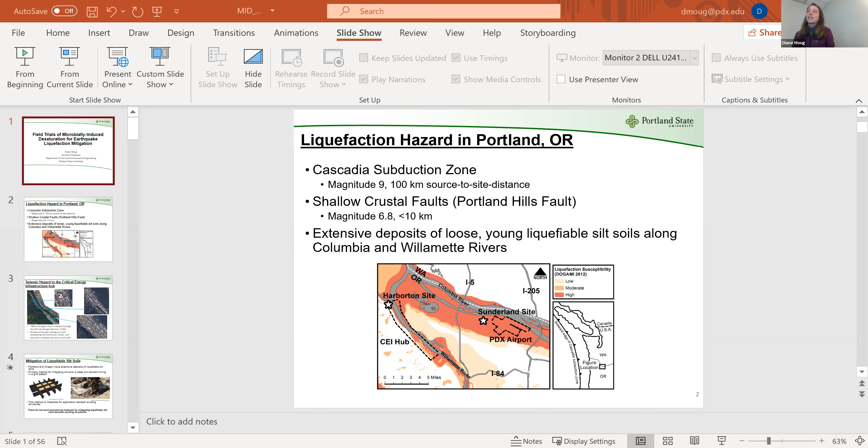There's particular concern about the liquefaction hazard in the Critical Energy Infrastructure Hub, or the CEI Hub. And this is an area along the Willamette River, shown here. There's many fuel storage tanks within the CEI Hub. And the hub itself is where about 90% of Oregon's fuel is handled, including all the fuel for the Portland International Airport. And so there's concern that the strong earthquake shaking can cause liquefaction of these silty soils, that can lead to deformation or settlement of the ground that then will put strains and cause damage to these fuel storage tanks.

And I've clipped some images here of the fuel storage tanks that are located along the Willamette River. So there's concern that this can cause an environmental impact if the fuel spills into the Willamette River and migrates down to the Columbia River. It can cause health impacts if there's hazardous materials that vaporize into the air or potentially burn. And then economic consequences as well, since this is Oregon's fuel supply. And if there isn't access to it following an earthquake, that will really hinder recovery from the earthquake itself.

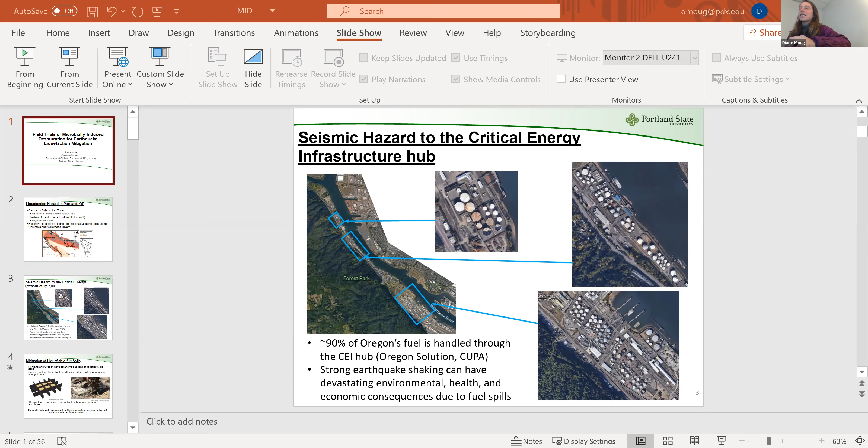So when we think about these silty soils and how we can mitigate the liquefaction hazard, particularly the soils beneath the fuel tanks, the primary method for mitigating these silty soils is deep soil cement mixing. And these are some images that I got from Condon Johnson Associates. So on the left here is a schematic of deep soil cement mixing, where the cement is mixed with the soil in a grid pattern, and that helps to reinforce the strength of the soil as a whole. It acts like rebar does in concrete, as in it provides strength for the whole element.

And then there's a video here again from Condon Johnson showing this deep soil cement mixing occurring from one of their projects. But what you can take away from this is that this is quite an invasive method.

This isn't something that can be reasonably applied beneath an existing structure, such as those fuel storage tanks. And where we are right now in geotechnical engineering practice is that we don't have any economical options for mitigating liquefiable silt soils beneath existing structures.

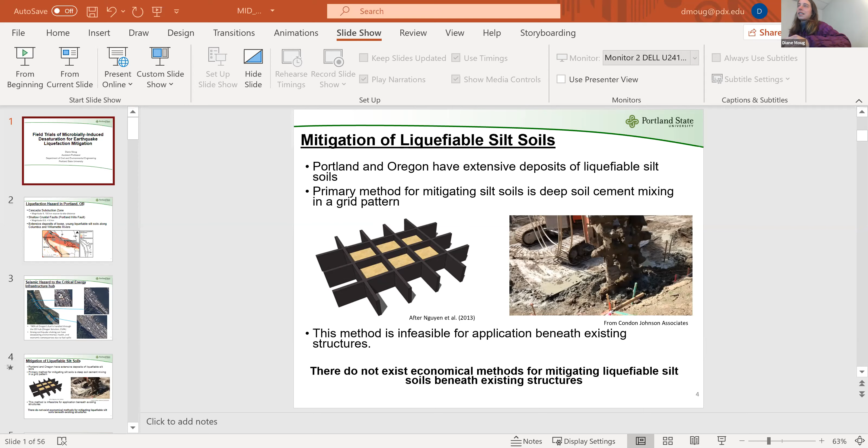So that's sort of where we're starting to look of, okay, what potential solutions are there for mitigating silt soils beneath existing structures, such as those in the CEI hub. And so that's where potentially using desaturation for mitigating liquefaction comes in.

This slide is presenting the results of a study by He et al. in 2013. And what this showed was that a small amount of gas in the soil's pore fluid can mitigate liquefaction by reducing pore water pressure buildup.

So when loose saturated soils are shaken in an earthquake, the soils want to contract or compress, but we have water within that pore space. And so the soils cannot contract, and instead they build up excess pore water pressure and lose their strength. So if we can reduce that buildup of excess pore water pressure, we can mitigate the liquefaction hazard.

So these shake table tests were performed with loose sands in a shear box on a shake table. And then on the left here is showing the results of 3 pore water pressure transducers that were embedded within that shear box, within the saturated soil.

So with this completely saturated soil, showing the results over time, where shaking starts at about 2.5 seconds, and then the water head, or the water pressure that builds up due to that shaking, you can see that there's an increase in excess pore water pressure during shaking, and then that dissipates after shaking stops.

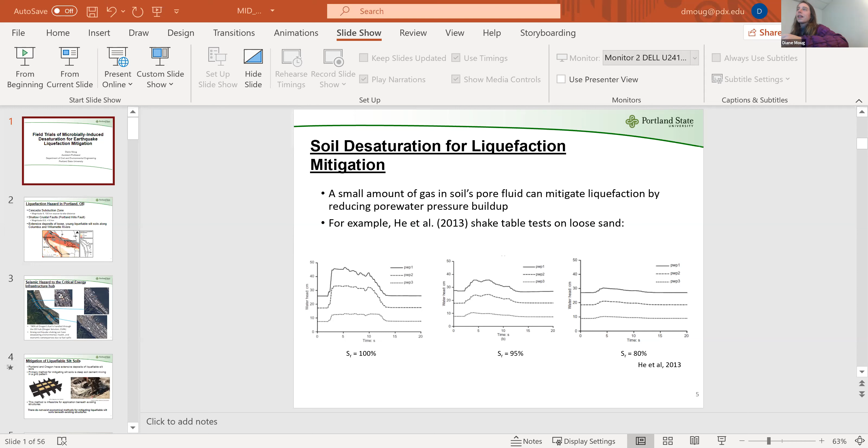In these tests, the saturation was then reduced to 95% saturation, so introducing some air into the soil's pore fluid, and you see that the excess pore water pressure buildup is much less than that fully saturated soil for the time of shaking. And we see an even further reduction when the saturation is reduced to 80%. So introducing some air, or gas, into the pore fluid, reducing saturation of the soil, limits pore water pressure buildup.

There's also results by O'Donnell et al. in 2017, and these looked at liquefaction resistance, or cyclic strength of the soil, as saturation decreases. So this plot shown here was performed with lab testing in a cyclic direct simple shear device. So a small soil element that's subjected to cyclic shearing.

Plotted here is the cyclic shear ratio, or the strength of cyclic loading applied to the soil element, and then the number of cycles that it takes to trigger liquefaction or to fail the soil cyclically in that loading. The dark dashed line on the bottom here is a fully saturated specimen.

And what we see here is that, let's say, for example, at a cyclic shear ratio of 0.3, it takes about 5 cycles to trigger liquefaction. And then at lower cyclic shear ratios, it takes many more cycles to trigger liquefaction.

If the saturation of that soil element is then reduced to 99%, the authors reported a notable gain in cyclic resistance of the soil. So now, for 5 cycles of cyclic loading, that's a cyclic shear ratio of 0.4. And then if the saturation is reduced further to 97%, we see an even further gain in liquefaction resistance.

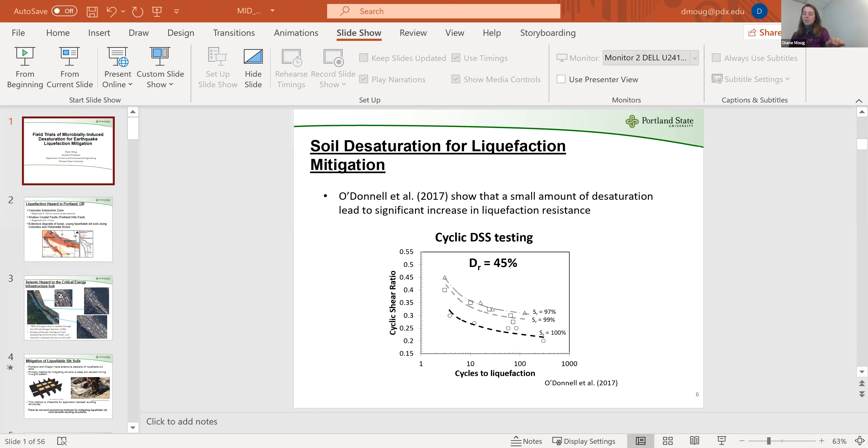And so what we started to think about, or what we used for this project, is a way to induce desaturation in soil using microbes that are native to the soil. And this is microbially induced desaturation, and I'll be referring to it as MID probably throughout the rest of the presentation.

And the idea behind this treatment method is that we can introduce a treatment solution into the subsurface soils that can migrate beneath an existing structure. And this treatment solution will stimulate native bacteria or microbes that are already within the ground to perform a denitrifying reaction. And that denitrifying reaction produces, as some of its products, nitrogen and carbon dioxide gas.

This gas then displaces some of the water in the pore space and desaturates the soil. And this can potentially lead to mitigation of the liquefaction hazard of the soil. This image here is from Sean O'Donnell's work, showing some evidence of microbially induced desaturation. Shown here, this is a sand grain.

These are two sand grains, one here and one here. And the reaction that they were looking at included also precipitation of calcite. And so these crystals here, this mineral, is calcite precipitation from the microbial reaction. But that precipitation developed around a gas bubble between the two sand particles. So this image is showing evidence of microbially induced desaturation, and that evidence comes from having the precipitation of the calcite between the sand particles as well.

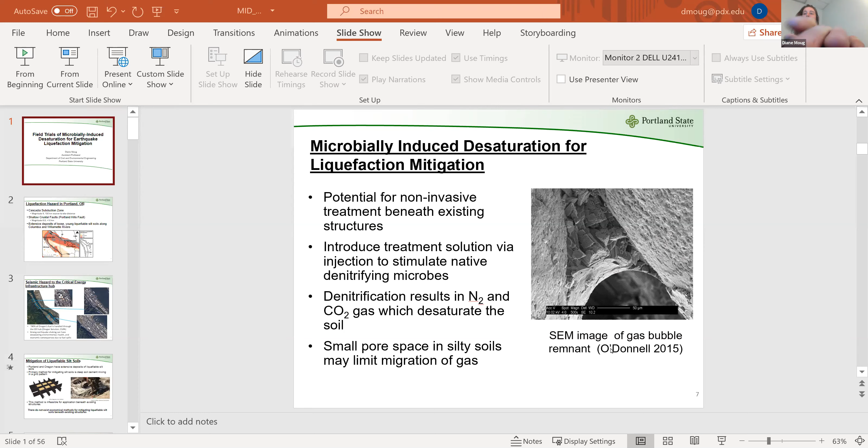Is it not in full screen? I am so sorry, I apologize. It is on my other screen. Let me share this. Okay. How's that? Perfect. Okay, I'm sorry about that, everyone. So you probably weren't even seeing my pointer either. So, okay, this is my pointer now.

So what we're concerned about, or initially concerned about, was gas migrating out of the pore space and then leading to resaturation of the soil. And so one thought was that by applying this treatment method to silty soils, the small pore space in silts compared to sands or coarser grained soils could potentially limit migration of gas out of the soil and lead to longer lasting desaturation.

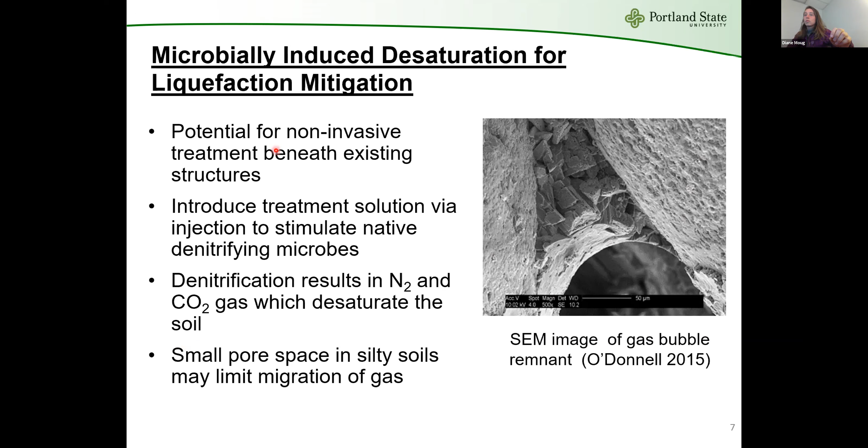So in order to look at MID for liquefaction mitigation, we did 2 field trials of this in Portland in the summer of 2019. And the objectives of doing these field trials were to look at the way that MID performs when it's applied at the field scale, to look at how it performs when it's applied in silty soils, and then to start to examine its effectiveness for liquefaction mitigation. And these 2 field trials were, as far as we know, the first full-scale field trials of MID for liquefaction mitigation in the US.

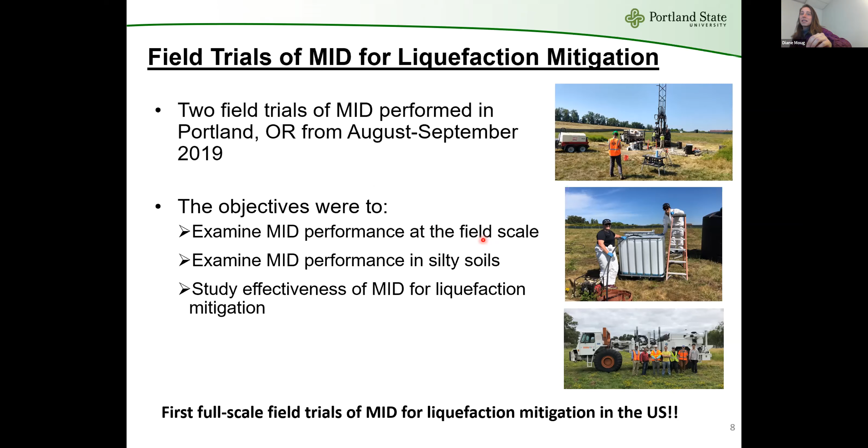So with that motivation of the project behind us, going forward in this presentation, I'll first talk about the subsurface conditions at the 2 field trial sites that we worked at, one called Sunderland and one called Harborton. I'll present the MID treatment solution and its application, and then also discuss some of the monitoring data that we collected and the results from those data. And finally, I'll discuss some of the T-Rex large shaker truck testing that we did at the site to perform in situ cyclic testing, and that was done at the Sunderland site.

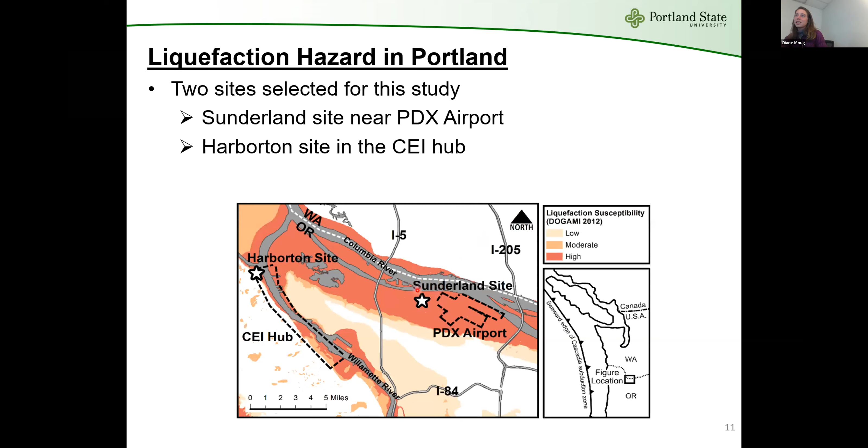The water table at the site was about 1 meter below the ground surface, and we've also seen some seasonal fluctuations in that water table as well. When we performed the trial during the summer, the water table was probably at its lowest extent, or one of the lowest extents. So when we looked at treating the soils at the Sunderland site with MID, we chose an interval to treat the soils from about 1.5 to 6 meters below the ground surface.

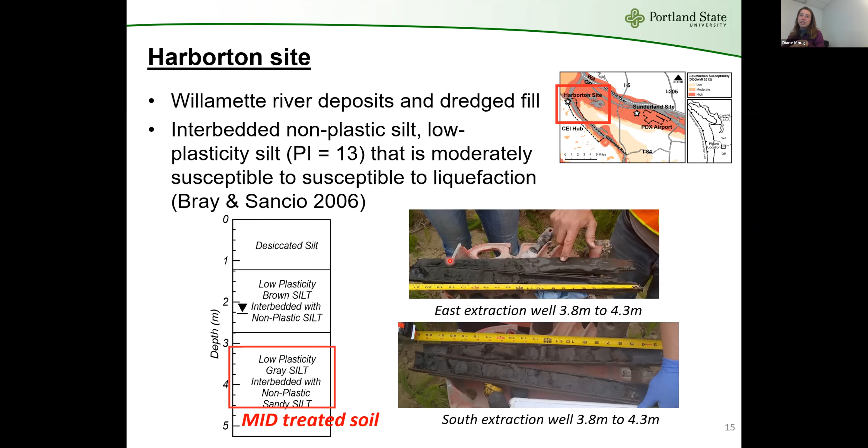So going to the way that the treatment solution was applied at the site and the treatment solution itself. The treatment solution was composed of calcium nitrate and calcium acetate, where these chemicals were placed into these mixing totes, and then water was added to them, and a trash pump was used to circulate them in order to dissolve them into solution.

So the treatment solution reaction, and I'm not going into depth for this here. There's more information on the treatment solution reaction in the Stallings-Young et al. 2020 paper. But I'm just kind of hitting on the main points here. The denitrifying reaction of the microbes is both a catabolic and an anabolic reaction.

With the catabolic reaction, that's where the acetate and the nitrate in solution from the calcium acetate and calcium nitrate react to produce nitrogen gas and bicarbonate, among some other products. That catabolic reaction also generates a little bit of energy, and then that helps to stimulate the anabolic reaction. And it's pretty similar, at least from my understanding of these chemical reactions, but it does produce some biomass as well as nitrogen gas and bicarbonate.

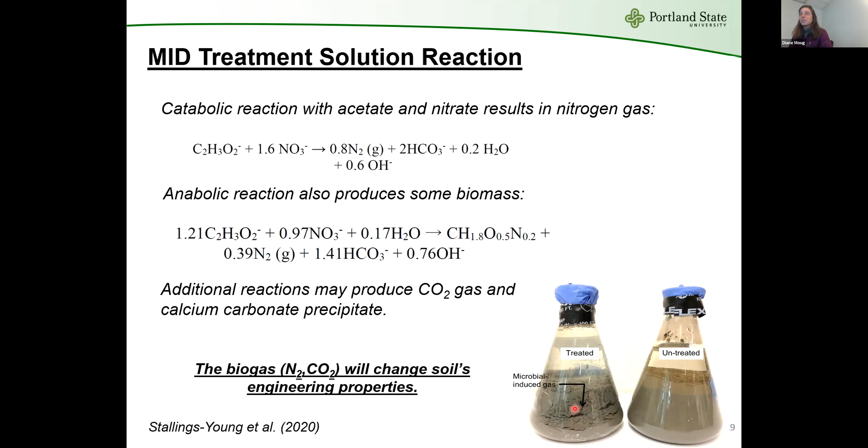So the treatment solution, once it was mixed and then diluted, was fed into the injection well, both through a gravity feed and then also an inline pump that added some extra pressure head in order to overcome both low permeability at the site and also any biomass that may build up within the well screen or the filter pack.

And then we also have a pressure gauge at the top so that we can see what injection pressure we're applying to the treatment solution, and also ease off a little bit if we feel like that injection pressure is getting too high.

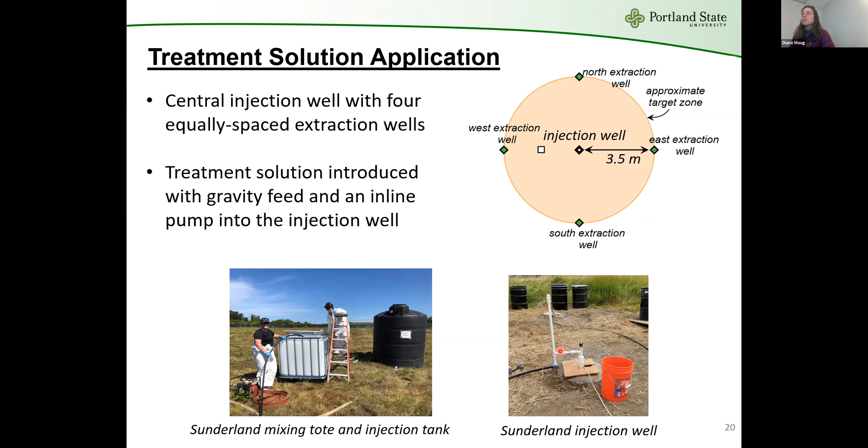The extraction wells had 2 purposes. The first was to give us water from the site, native groundwater, so we could use that for the treatment solution and to mix it. Second was that we were hoping that they could provide some drawdown that would encourage the migration of the treatment solution from the injection well to the extraction well. So we wanted some drawdown, but we didn't want so much drawdown that we were drawing down into our targeted treatment interval and inducing desaturation that way.

So in order to limit the drawdown in the extraction wells, and then also not allow the extraction wells to run dry, we set up a control system that only drew down the water in the extraction wells to a set level. And so these are the submersible pumps that were lowered into the extraction wells. They extracted water that then went into the extraction tank for storage and also for some monitoring.

And then within these submersible pumps, we also included a float switch, so when the water level dropped below a certain depth, the float switch would drop down as well. And it would break the circuit from the battery to the submersible pump. Then the water level, once it was allowed to recover, would bring that float switch back up.

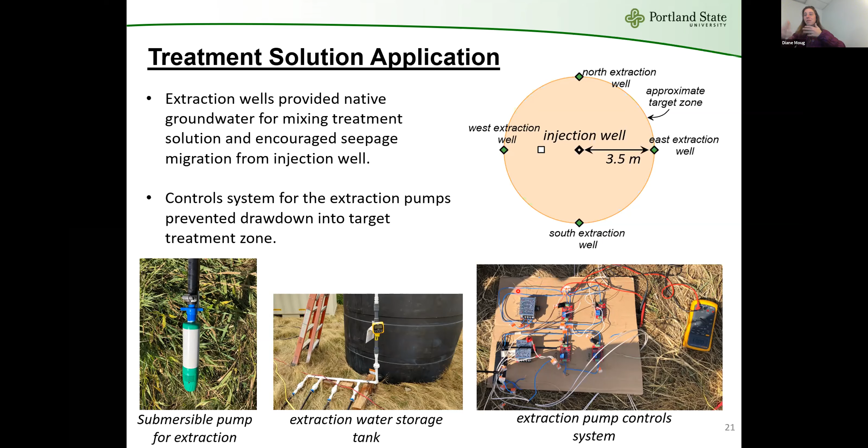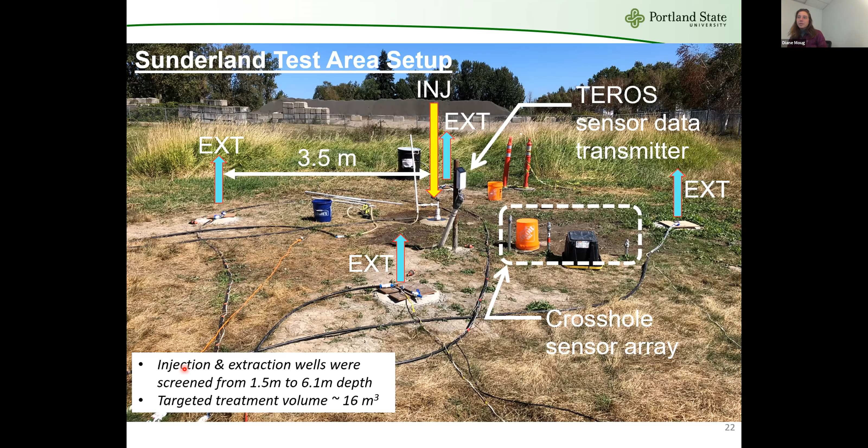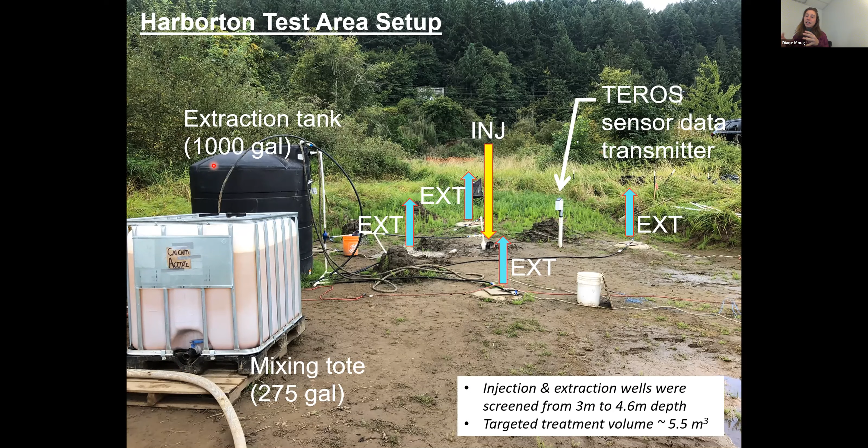Both the injection and extraction wells at this site were screened from 3 to 4.6 meters depth. And so our targeted treatment volume was about 5.5 meters cubed, so about a third smaller than at the Sunderland site. So we applied the treatment solution for about 4 weeks, in that we injected it through the injection well and ran the extraction pumps for about 4 weeks. And during this time at the 2 sites, we introduced about 60% of the pore volume in that targeted treatment zone into the subsurface.

These figures here are showing the treatment injection volume over time from our start of treatment. The Sunderland site on the left, and you can see that the treatment injection volumes started maybe a little bit slow as we kind of nailed down our methods and did some troubleshooting. But then after about 15 days of treatment, we understood the proper injection pressures and how to overcome the biomass that builds up within the injection well and within the plumbing lines as well. And you can see that our rate of treatment injection increased quite a bit and stayed steady from about 15 days.

The Harborton site, we started treatment at that site about a week after treatment started at Sunderland. And so we were able to keep about a steady injection rate at the Harborton site as well. And with both these sites, like I said, the volume of solution that was introduced into the subsurface relative to the size of the targeted treatment zone was pretty similar between the 2 sites. And we think that it was about 60% of the pore fluid volume within the targeted treatment zone.

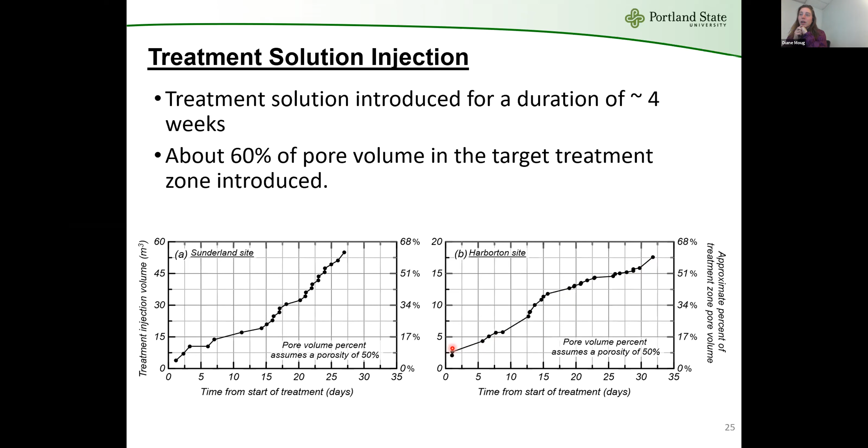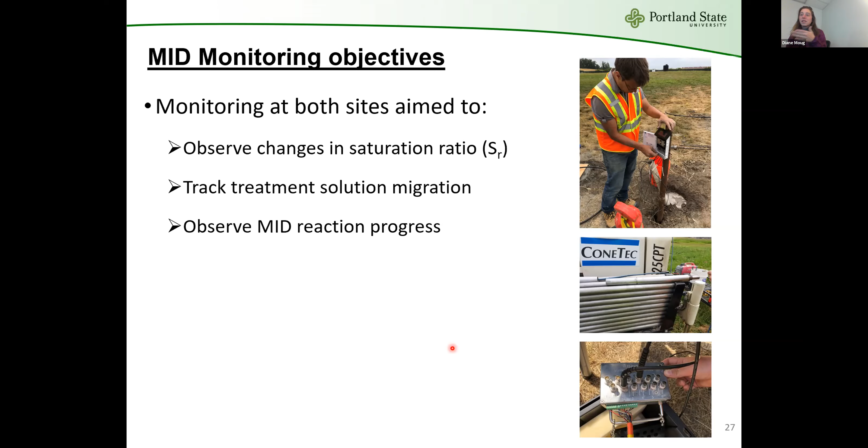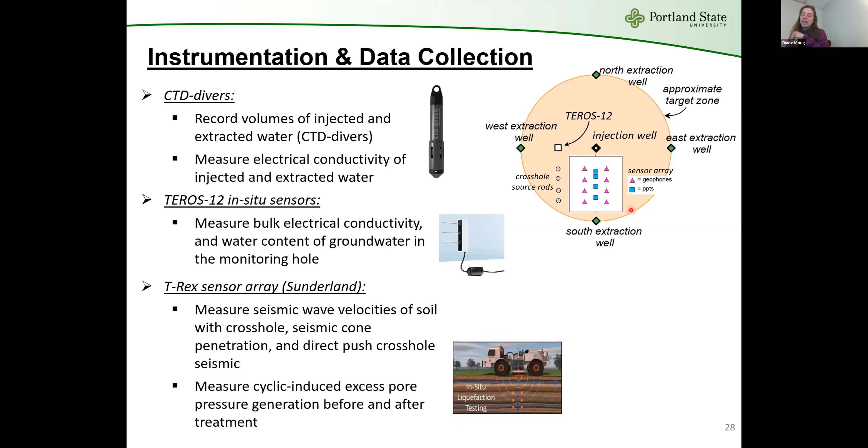The T-Rex sensor array was also used to measure cyclic induced pore water pressure for testing that was done with the T-Rex shaker truck before MID treatment and then after MID treatment. And that's this picture shown here, the schematic of the T-Rex shaker truck. Again, the TEROS vertical sensor was located between the injection well and extraction well. And then at the Sunderland site, we have the T-Rex sensor also located within the targeted treatment zone between the injection well and an extraction well.

So the CTD divers were primarily used to look at the electrical conductivities in the injection and the extraction tanks. And electrical conductivity was useful because it's related to the salinity of the solution. The calcium acetate and the calcium nitrate that we dissolved for the treatment solution, those are primarily salts. But then as the reaction takes place, the products are primarily gases, biomass, and maybe a little bit of precipitate. So that's removing the salts from solution, and therefore we should see a decrease in the electrical conductivity as the MID reaction progresses. So a sensor for electrical conductivity may initially see a rise in electrical conductivity as the treatment solution reaches that location, but then a decrease as the MID reaction takes place.

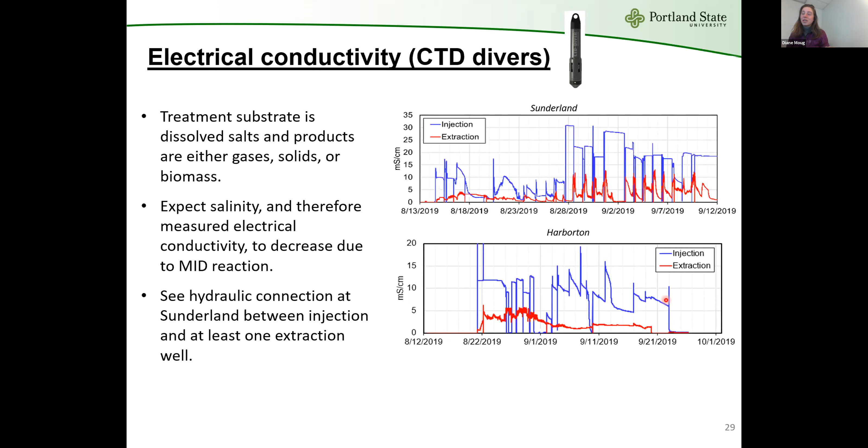Electrical conductivity was also measured with these TEROS sensors. And so this is where we could look at the treatment solution vertically, since the sensors were installed in a vertical array midway within the treatment zone. So starting with the Sunderland site, I won't spend too much time on this site. The sensors weren't installed correctly at the Sunderland site. We had some trouble with this being our first install of these sensors, and the sensors ended up just being placed in the hole and then backfilled with soil and then placed, backfilled, placed, backfilled.

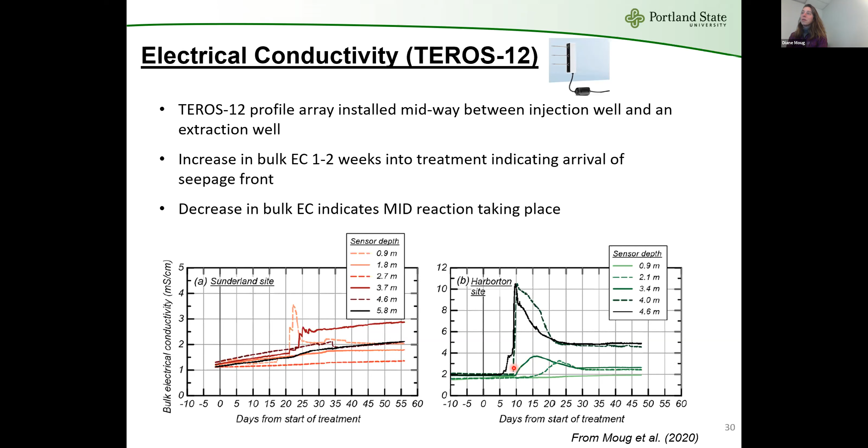The TEROS sensors, they also measure dielectric or electric capacitance of the soil. And this electrical capacitance, it can relate to the volumetric moisture content of the soil. And so this was useful to see and look at relative changes in moisture content throughout treatment. We still need to look at these values and validate them with measurements of moisture content at the site, but they are useful to see those relative changes in moisture content.

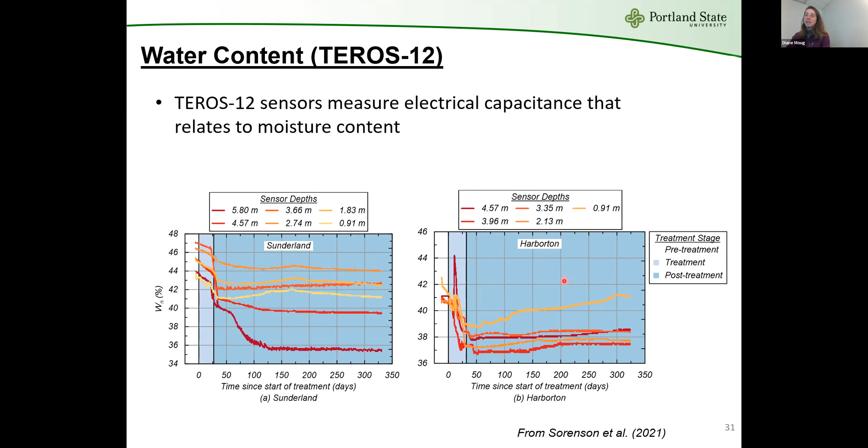So as the soil desaturates, we expect the ratio of water to soil to decrease. We expect the moisture content to decrease. And that's what these measurements show as well, is that there is a decrease in the moisture content where these sensors are installed, both at the Sunderland site and also at the Harborton site. And these moisture contents, we could then relate to the saturation in situ and say that changes in moisture content also relate to changes in saturation.

We did assume initial values of saturation at either 100% or 98.5%, and these were based on some other measurements that we made. And so what we see with these approximated saturation ratios is that at the Sunderland site, we got a drop in saturation ratio to potentially between 80% and 96%, but more importantly, we saw a decrease in saturation. That decrease in saturation is also supported by measurements of saturation on Shelby tube samples.

This is the result here of a sample that was sampled before treatment, and then a sample that was obtained post-treatment. Again, these saturation ratios may be a little bit off and maybe a little bit underestimated, where we would have expected this one to be nearly 100% saturated, and this post-treatment sample to be probably at a higher saturation ratio. But they do show a decrease in saturation, despite the difficulties of testing and measuring saturation ratio.

We see something similar at the Harborton site, where we get a decrease to about 90 to 95% saturation according to these TEROS sensors. And again, support that the site was desaturated from a Shelby tube sample that was measured.

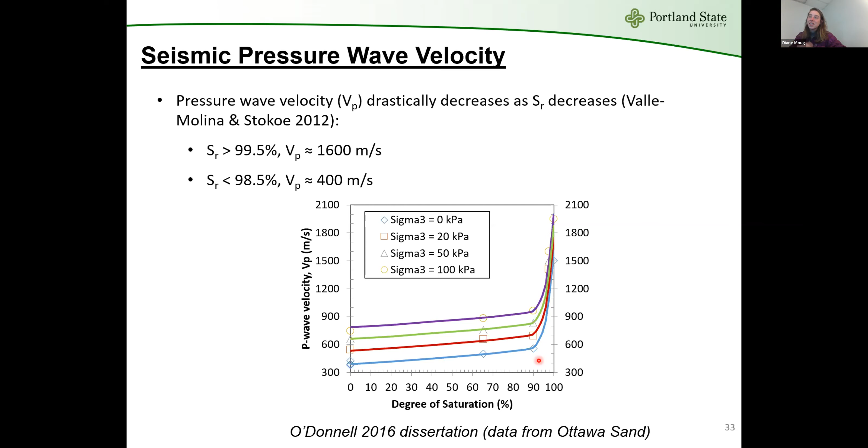This is shown here from the O'Donnell 2016 dissertation data from some P wave measurements at various saturation ratios that were performed on Ottawa sand. What you see is that at 100% saturation, we have a high P wave velocity, on this plot about 2,000 meters per second. And then as saturation decreases, we have a drop in P wave velocity to about 400 to 800 meters per second, depending on the confining stress on the soil. So if we measure at the site initially high P wave velocities that then decrease, that's an indication that there is desaturation introduced in the subsurface soils.

And the advantage of this is that they were fairly low effort. So once the sensor was installed, we could perform these tests quite frequently, both before MID treatment, while the treatment solution was being applied. And then also we can look at the seismic wave velocities after the MID treatment.

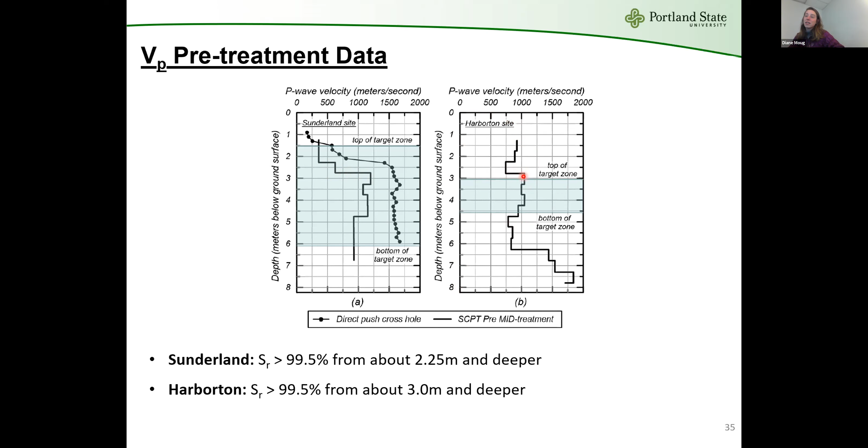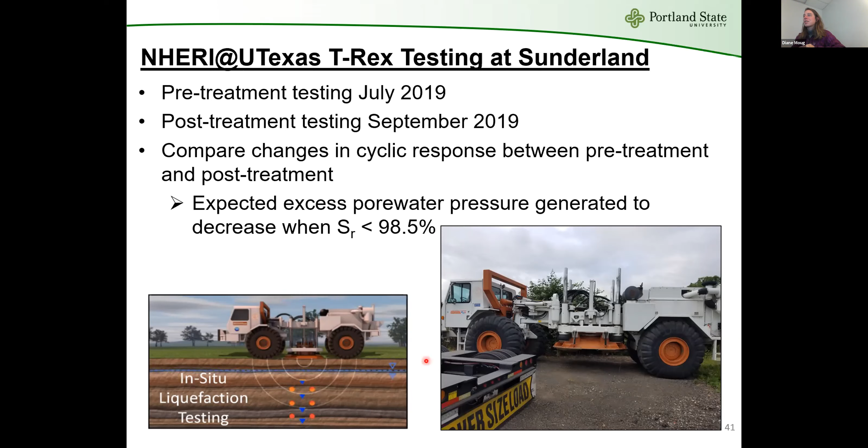So these are pictures of the T-Rex shaker truck. On the left here is a schematic of the truck on top of the sensor array, where the base plate gets lowered down onto the ground surface, and then through that base plate, a sinusoidal cyclic motion is applied to the ground surface, and that motion attenuates with depth. So it's stronger at the ground surface and then weaker as it attenuates with depth. And this is a picture of the T-Rex shaker truck at our Sunderland site.

This figure here is showing the sensor array. Again, this is the same sensor array that we used for those crosshole measurements. But now we have the T-Rex base plate located on top of the sensor array. And we have the geophones that create an element of soil. And from those geophones, we can estimate the amount of cyclic strain that's imparted on the soil, and then relate that cyclic strain to the pore pressures that develop within those soil elements with depth.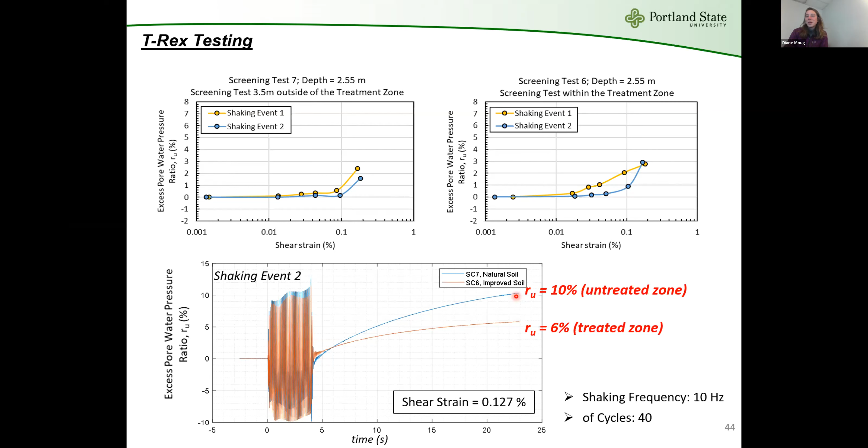The red line is within the treated zone, and we see the excess pore water pressure increase to about 6% post-shaking. And that's notably less compared to the excess pore water pressure ratio that developed in the untreated soils, which rose up to about 10%. So we potentially see some change here if we look at excess pore water pressures that develop after shaking between the untreated and the treated zone. But the interpretation of these data is still ongoing.

So this gives us an indication that with the T-Rex testing, in order to see changes in the cyclic behavior of these soils, we may need to be testing at slightly larger shear strains and finding a way to impart larger shear strains on the soil to gauge the response to the cyclic loading and the impact that desaturation has. So those are our data from our field trials.

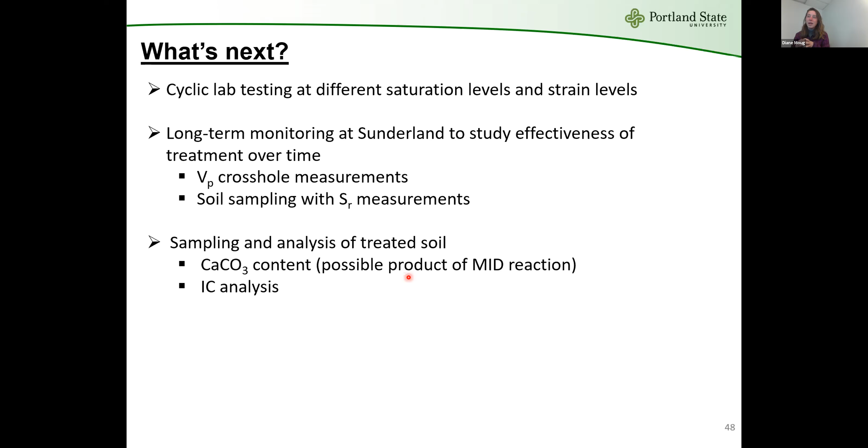And with that, I'm sorry that went a little bit over time, but I'm happy to answer any questions. I don't imagine you all have classes to get to at this time.

I can start with a question I have from Ali. How reliable is the data for pore pressure since the sensors are probably desaturated as well? That's a great question. So as we understand it, the sensors themselves were saturated, I believe, with mineral oil before they were placed into the ground. And so I believe that there's hope that the filter element or the piezo element on those sensors remains saturated with the mineral oil.

But yeah, it's a good point, and potentially a way that we've discussed why you see that almost log-linear trend between the RU and the cyclic shaking response for that first shaking event in the treatment zone. But actually, that sensor was lowered into the ground after the MID treatment had taken place. So it was likely saturated.

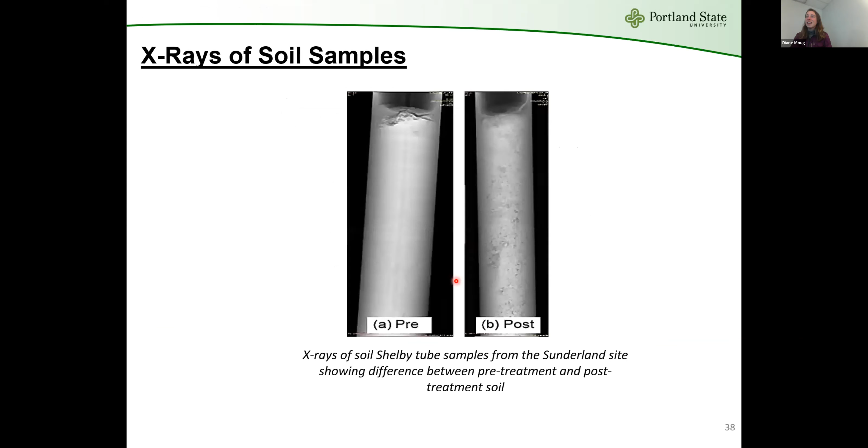Another question: you would have some swelling during sampling, so your calculated SR, or saturation ratio, may be different from the in situ saturation ratio. Yes, absolutely. That's a really great observation. And that's one of the challenges that we had for directly sampling and measuring saturation ratio. Just thinking back to the ideal gas law, PV equals nRT. The soils in the subsurface are subjected to in situ total stresses, and that's compressing the gas, the biogas that's been produced. Then we bring those soils up to the surface and now they're at atmospheric.

And so, yeah, we do expect that the volume of gas in the soil samples did expand. The values for saturation ratio shown here do have a correction with the ideal gas law to change the volume of the gas. We still are seeing these sort of funny saturation ratio values. So maybe it's a combination of insufficient use of the ideal gas law and potentially also just moisture loss during the sampling, storage, transportation, and then also testing as well.

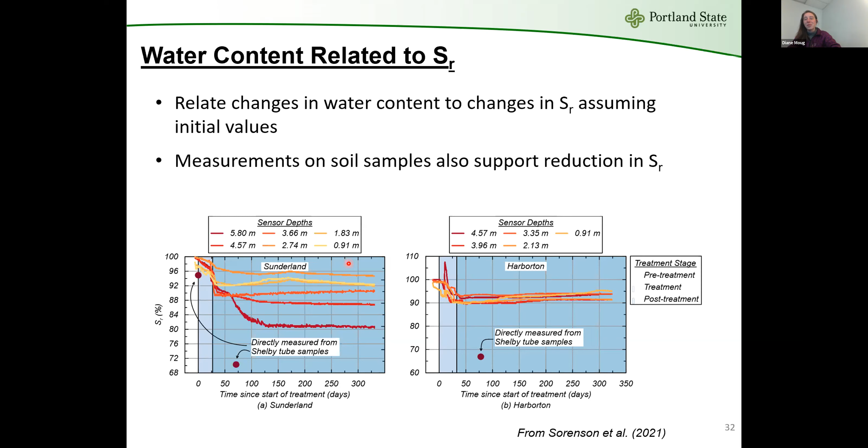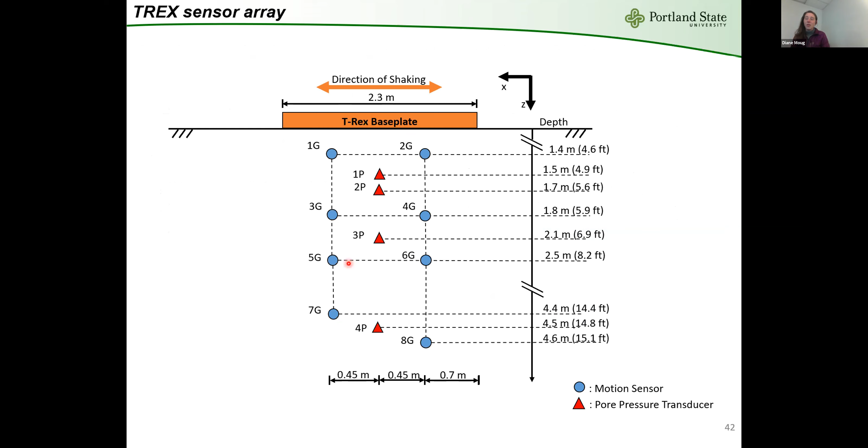What is the minimum strain level you can apply with the DSS device? That is an ongoing discussion. We have some results that aren't terrible, I think at 0.1% shear strain. I tend not to put too much weight into those results. Just with the displacement transducers and the load transducers that we have, I'm not convinced on how reliable they are.

During small strain, is there any fluctuation in normal strain, and is your shear LVDT inside the cell? No, the shear LVDT is not inside the cell. I believe that it's outside the shear box, so it's looking at changes in the shear box. And is there any fluctuation in normal strain? I would have to take a look. I believe that there's only kind of the normal fluctuations that you see at the larger strain values. But yeah, I'll have to get back to you on that as I go and review the test results.